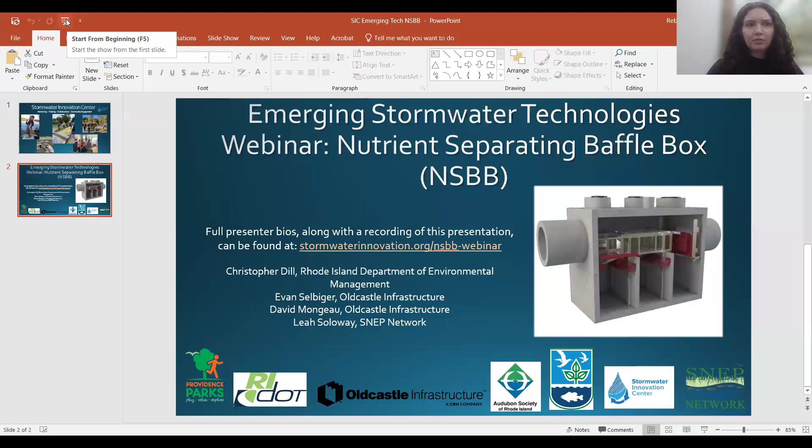So before we begin, I'm Rebecca Reeves, Education Outreach Manager with the Stormwater Innovation Center. To provide a little bit of background on the Innovation Center as well, I thought I'd share a few slides. So we are an organization that's part of the Audubon Society of Rhode Island. However, we focus on stormwater initiatives. Much of our work is based in the urban core of Rhode Island and in Roger Williams Park in Providence. However, we do work all over the state. And our 4 pillars of our work are monitoring, training, community engagement, and collaboration.

So just to give you a taste of some of the projects we do, these are some pictures from our projects. So upper left here, we have one of our partners at the Nature Conservancy monitoring for invasive carp in one of the water bodies within Roger Williams Park. This picture to the bottom right below it is a monitoring initiative we have called RainSnap, where we ask volunteers to monitor green infrastructure performance within Roger Williams Park.

And then right next to that is at our Rain Harvest Festival, which is an art and music festival in the park where we highlight environmental topics. So we had an artist come in and create a mural at the inlet to one of the green infrastructure projects within the park. So we had some families touring that and doing a little scavenger hunt activity.

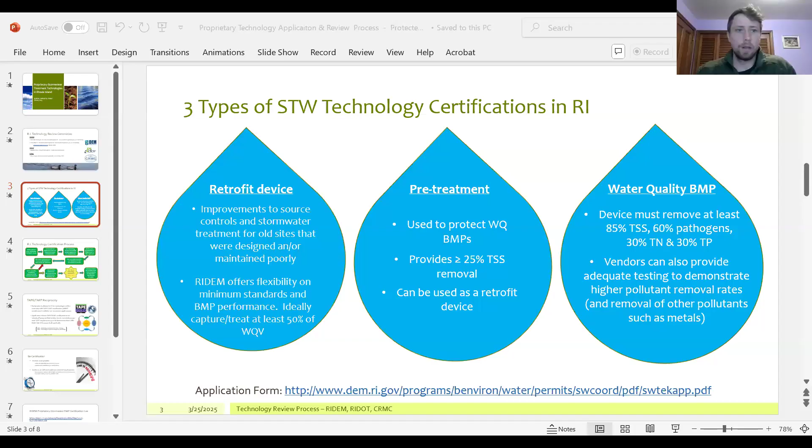All right, let me switch this. Can everybody see that now? We got it. Awesome, thank you.

Cool, so hello everyone. My name is Christopher Dill. I'm an environmental engineer with the Rhode Island Department of Environmental Management, and I work in the Stormwater Construction Permitting Program. We're the folks that approve different stormwater proprietary technology devices for the state of Rhode Island.

The technology review committee is comprised of staff from Rhode Island DEM, DOT, and the CRMC, which is the Coastal Resources Management Council. From DEM, we have my supervisor, Nicholas Pisani, and myself. I'm the primary contact for this program. So if anyone has any questions about it, or if a vendor would like to apply to get their technology certified by Rhode Island, they would reach out to me and we would get the process rolling, which I will go over in just a minute. From DOT, we have Deirdre Pava, and CRMC, we have Ross Singer.

So just a quick overview of the ways we can approve devices. Basically, there are 3 buckets that things can fall in. You start out with retrofit. That's pretty general. The requirements are pretty loose, and we're just looking to make an improvement on some older sites that could benefit from some stormwater infrastructure. A lot of these proprietary devices are great because they're typically more condensed, so they take up a lot less space in more urban areas where it can be tough to get treatment.

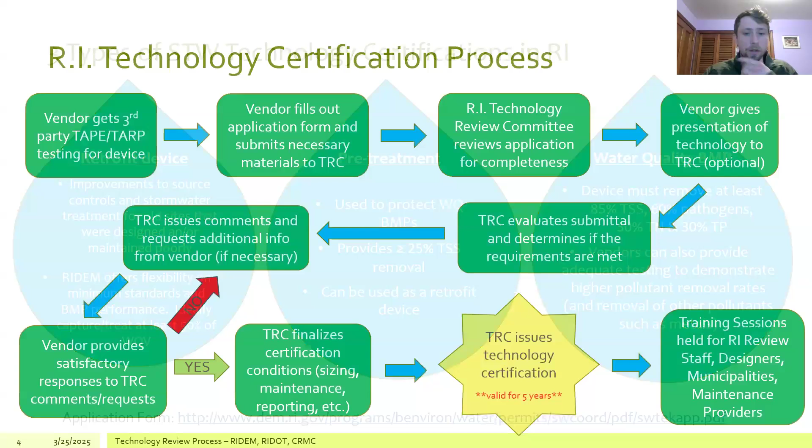The final bucket, which is the most strict and hardest to get certified for, is for a water quality BMP. That would be on par with a sand filter or an infiltration basin. To qualify, the device has to get 85% TSS removal, 60% pathogens, and 30% for nitrogen and phosphorus. Vendors can also demonstrate other pollutant removals such as metals, or removals higher than our baseline standards. The device we're going over today, the NSBB, is certified for pre-treatment and retrofits. At the bottom of the slide, you can see the page with the application form for vendors that want to submit technology applications.

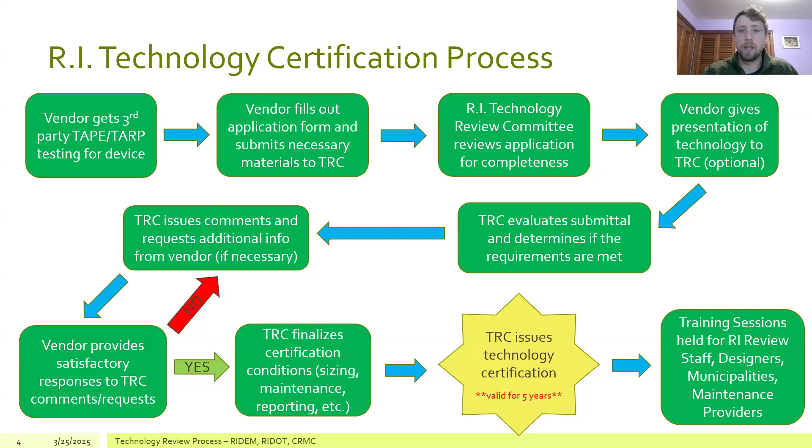This is a flow chart of our process. Basically, the vendor gets TAPE or TARP testing, which I'll go over in another minute, showing that the device meets the pollutant removal criteria. They submit their application. The technology review committee reviews and evaluates it, and typically we have some comments or questions that we'll go back with. If the vendor can satisfy our concerns, then we certify the device and work out the final conditions, like sizing, maintenance, reporting, and whatnot. We issue the certification, which is valid for 5 years. And then we end up where we're at today, training people on it and trying to get it out there so people can make use of these wonderful devices.

Like I said, the TAPE and TARP programs, at the bottom of the screen you can see what those acronyms stand for. TAPE is a program through the state of Washington. They're basically the front runner for certifying these types of devices with a very standardized testing protocol. The TARP program has since been dissolved, but typically anyone that gets a New Jersey certification qualifies for pre-treatment. If they don't have New Jersey or Washington certifications, they can submit third-party verified testing that has to be on par with TAPE requirements. You can refer to those sections of the Rhode Island stormwater rules to read up on that more. But typically reciprocity through those other programs is the fastest and easiest way to get a device certified.

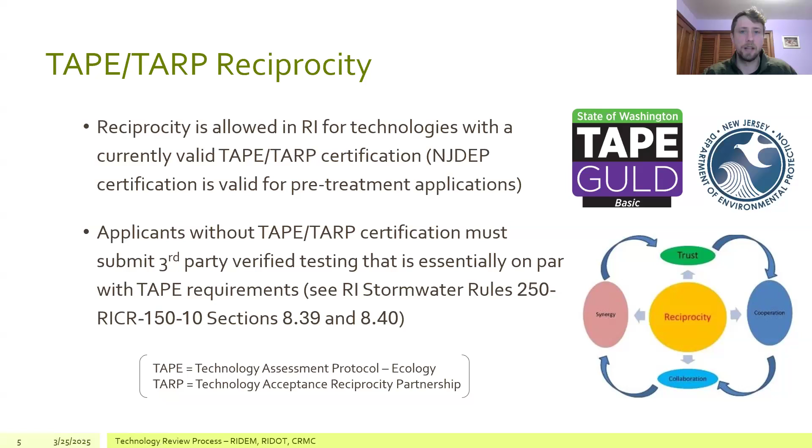As I previously mentioned, the certifications are good for 5 years. At the end of that 5 years, the vendor has to get it recertified, basically show us that it's still working and give us any new studies they've completed. And if they had previously received reciprocity, we'd like their other certifications to still be active if we're going to recertify.

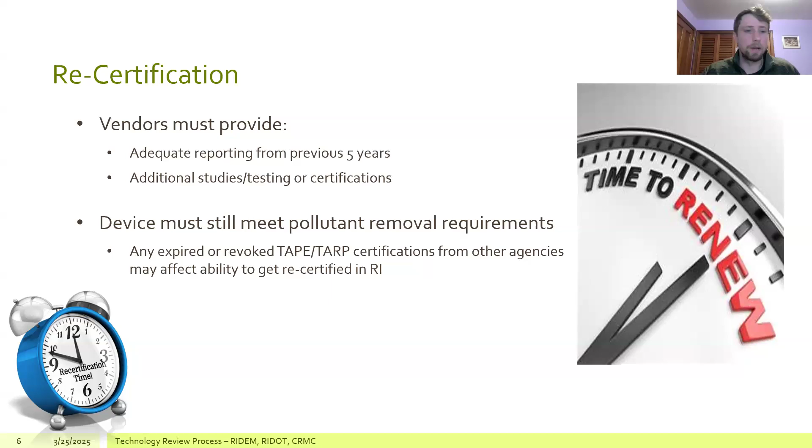So going back to the presentation, I don't know if everybody was actually able to see that or not, if it was just stuck on my PowerPoint. But if you didn't, just click on that link and you'll be able to check it out.

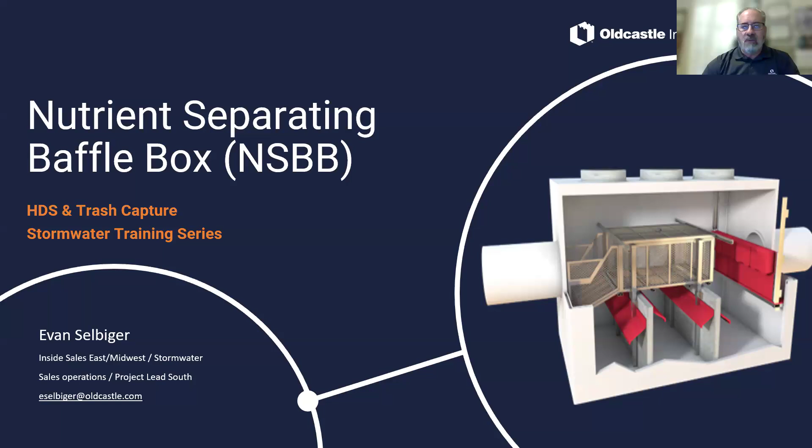I've been working for Oldcastle for 9 years. Some people consider me the NSBB product specialist, but my main role is inside sales. With that, I'm going to jump right into this and get started.

So the objective of this webinar is so that you can learn everything that you need to know about what the NSBB is and what it does. We're going to go over sizing, how to use them, and then the key message is going to be about maintenance.

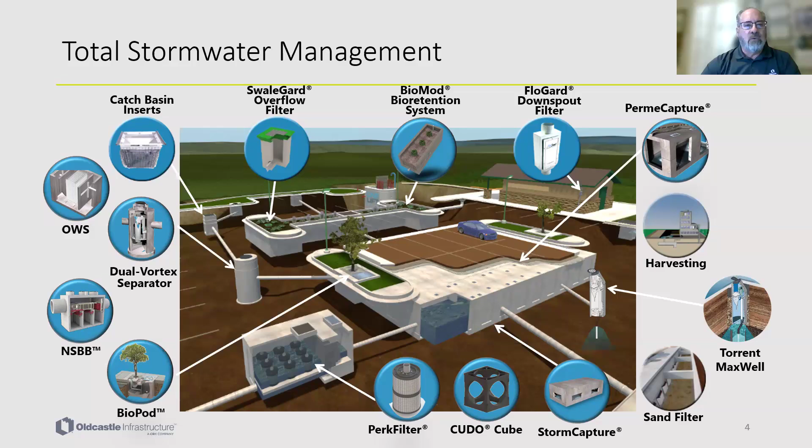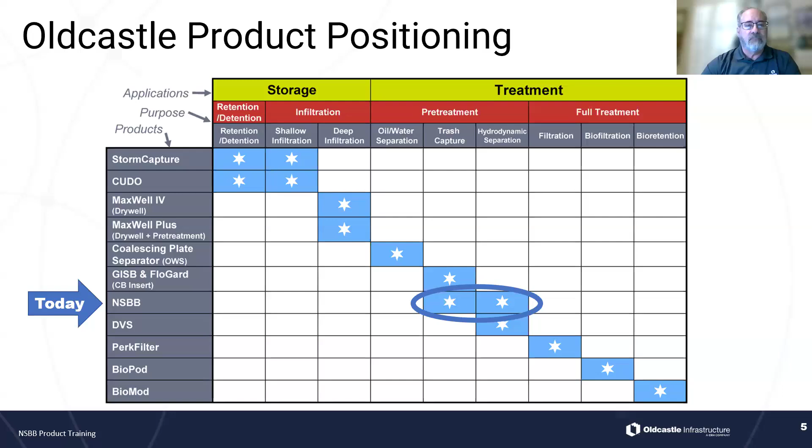So the NSBB is just one of the offerings that Oldcastle offers in our total stormwater management portfolio. It is a pre-treatment device. It can be pre-treatment for underground storage, above ground ponds, and it can be used for pre-treatment going out to impaired water bodies. It is a hydrodynamic separator, and it's also California trash capture compliant. I know we're not in California, but I just thought I'd mention it.

So the NSBB, or the nutrient separating baffle box, is a pre-treatment system to remove TSS, gross solids, trash, and debris. One of the unique features of the NSBB is our centralized screen system, which sits above the static water level when the rain stops, so that allows everything else in there to dry out between rain events.

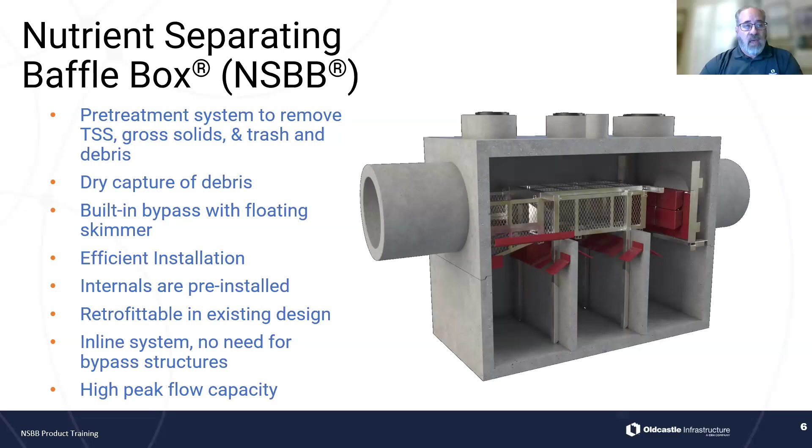Installation is easy for the contractors. Everything is pre-installed inside the concrete vault. It's a two-part system, so you have a base and a top section, which makes it easy for contractors. It is retrofittable, as Chris had talked about earlier, to existing watersheds, and it can also be done in new construction. It's inline, so there's no need for external bypass — all the internal bypass happens inside the system. And it has a high peak flow capacity.

We do have major approvals. We did just pass the new NJCAT, NJDEP certification and verification beginning of this year, 2025. We also have the Washington Department of Ecology, and the California Water Board approvals.

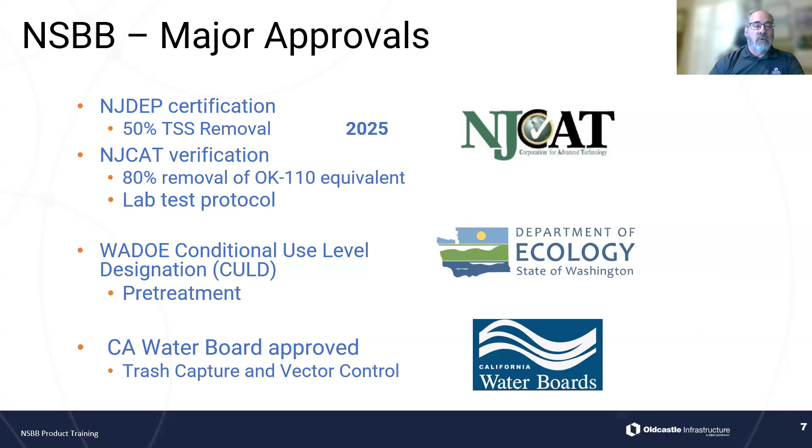And I don't think anybody's going to be able to hear the sound on this, but I'm going to play it and I'm going to talk through it. So you can still hear me, I'm assuming, Dave, correct? That is correct. And the video is playing as well.

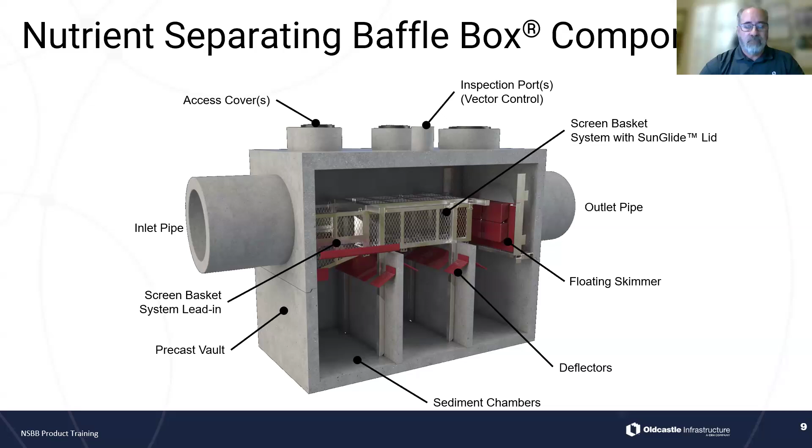Here's a little bit better look at it. You've got your standard 3/4 inch expanded metal - that's what comes standard. And in California, the trash capture 5mm perforated stainless steel screen is what's required.

The lids are what we call the SunGlide lids. They have a latch in the center and they slide open - they don't hinge, they slide open. You do have bottom doors that hinge open, which allows you to access the sumps for cleanouts. Nobody has to enter the vault in order to clean it out. Everything can be done from the surface.

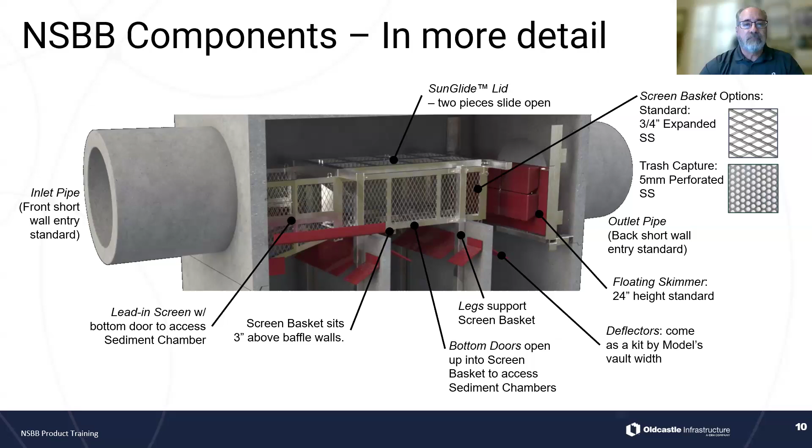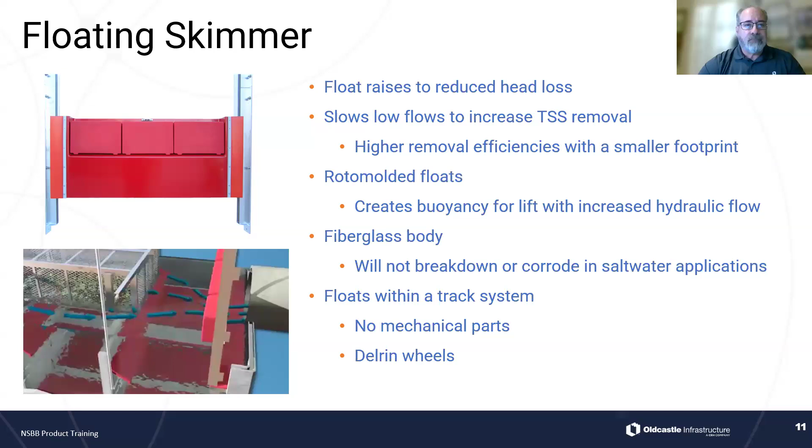So your standard vault sizes are 4x8, 5x10, 6x12, and 8x16. These are internal measurements - there are other sizes available. We use these sizes because they utilize standard forms, which makes construction that much easier at the precast level. There are other special sizes, a 10x20 and a 12x24 - those are segmented boxes, put together in several pieces, the bottom and the top.

You have a straight in, straight out pipe orientation on these boxes. However, the NSBB is capable of multiple pipe entries - in other words, you can have 4 entries into the nutrient separating baffle box: straight in from the front, 2 each from either side, as long as it's in the first chamber, and then you can actually have a grated inlet over the top of the first chamber.

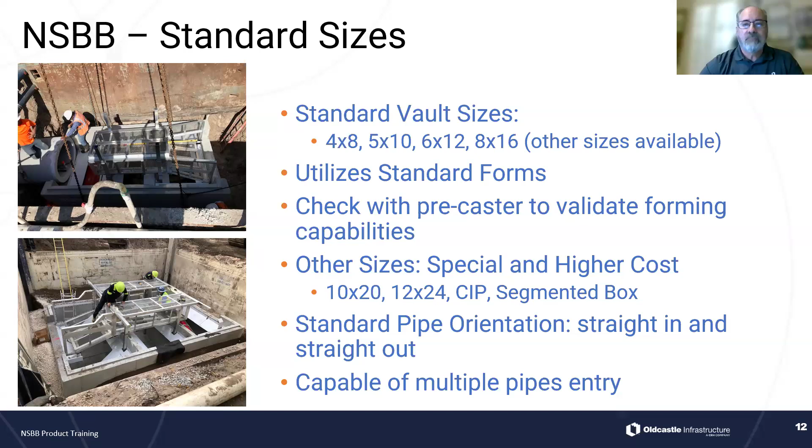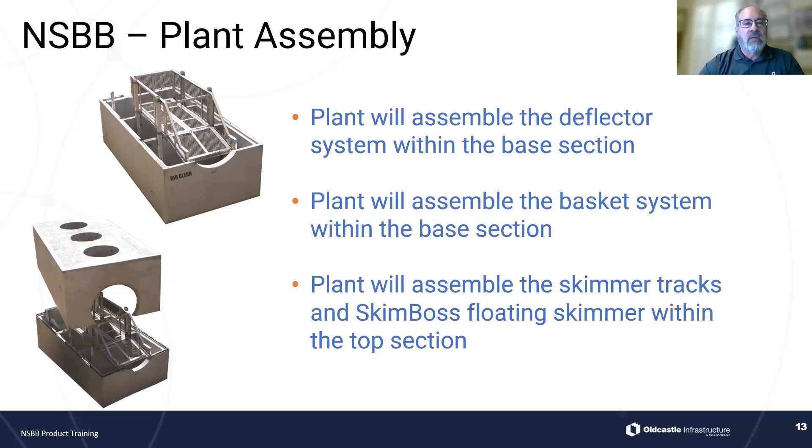So again, your plant is going to assemble all of your parts and pieces in the bottom half, including the screen system. The top half will have the tracks and the skimmer already installed, so that when it gets to the job site, all the contractor has to do is install the base, install the top, connect the pipes. The contractor is going to verify elevations, and they will install the inflow and outflow pipes.

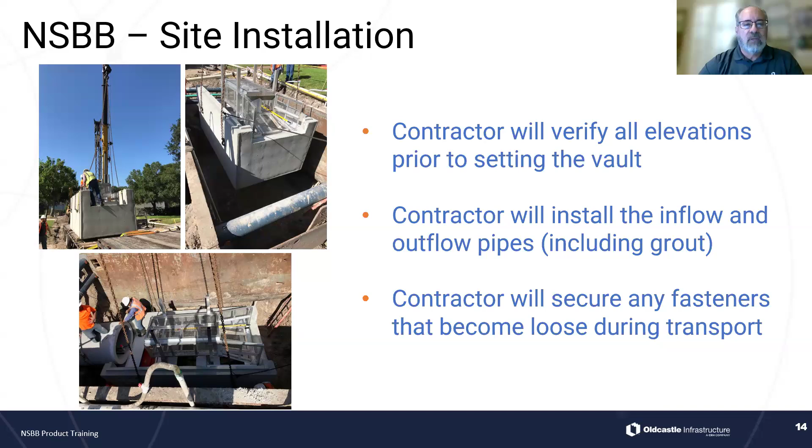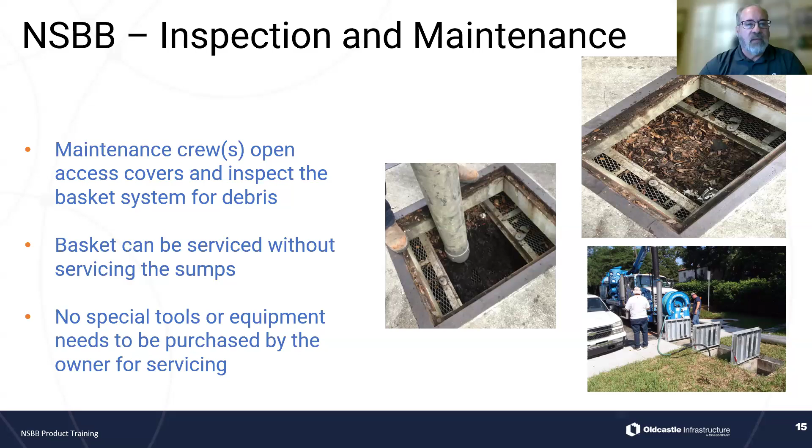Inspection and maintenance - again, maintenance can be done, as you can see in this bottom right picture, all done from the surface. No one has to enter the structure in order to clean it out. The top doors slide open so that the vac can vacuum out everything that's inside of the screen system. Here's a picture - you can see the top doors are slid open. There's a lot of leaves in here, and I'm sure up through New England during the fall is a heavy leaf dumping time. After rain events, the NSBB will collect a lot of leaves. So again, no special tools or equipment is needed in order to clean it out.

So when you're designing your system, some of the things you need to know that are going to help us let you know what size structure you're going to need: whatever the regulatory requirements are, the treatment flow rate is very important. We also want to know what the peak flow capacity is, what the pipe size is, and if the pipes are coming in or straight out, and at what angle if they're not perpendicular to the box.

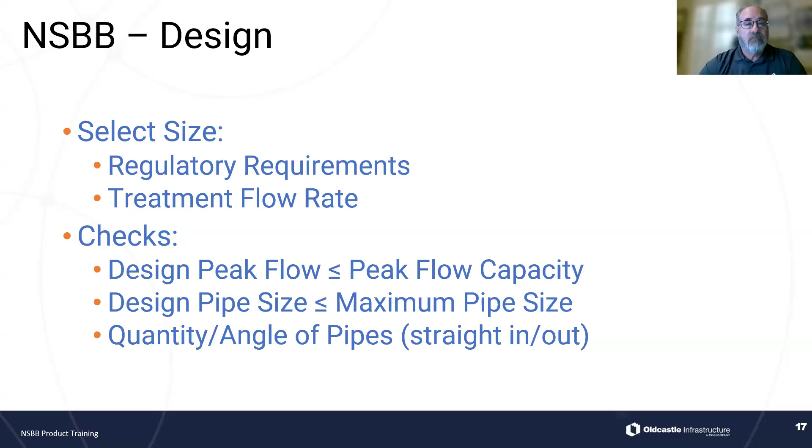This is just a summary of the newest NJDEP numbers for your sizes and your treatment flow rate to meet that 50% TSS removal rate.

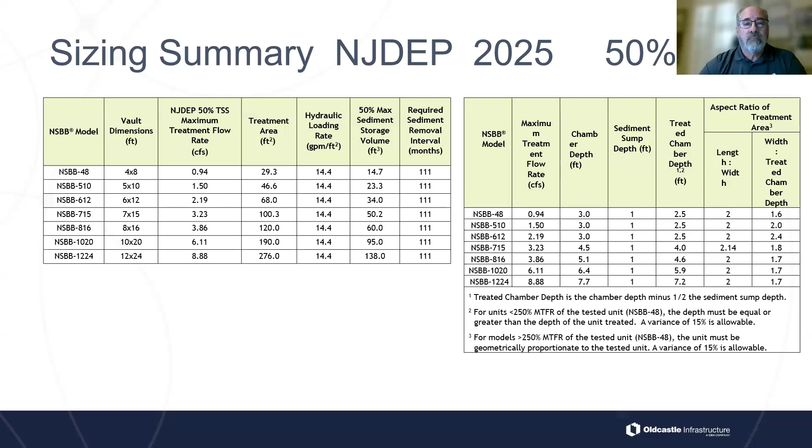And again, this is just a little bit more information that all was derived from the testing.

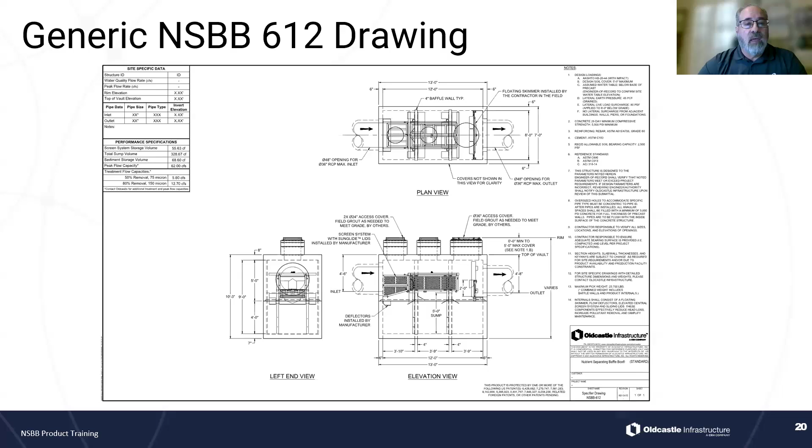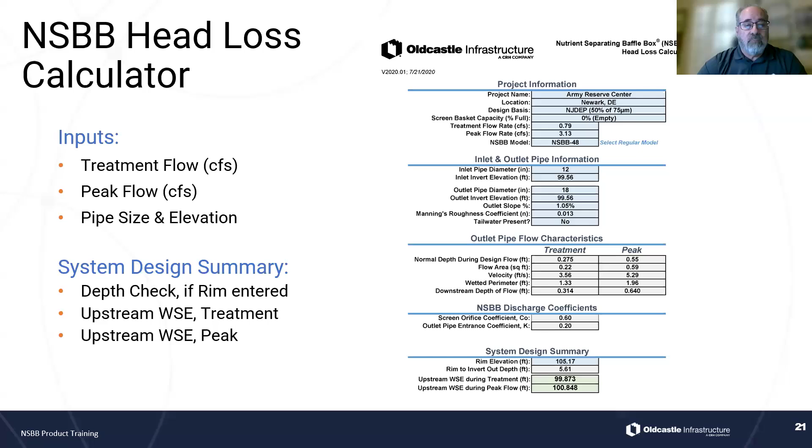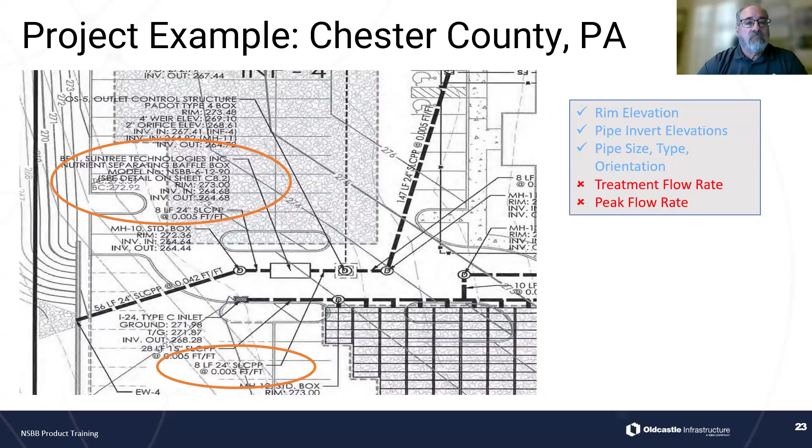So this is, again, just the review checklist that we perform. And again, we're using model 612, 6 by 12, on this particular project.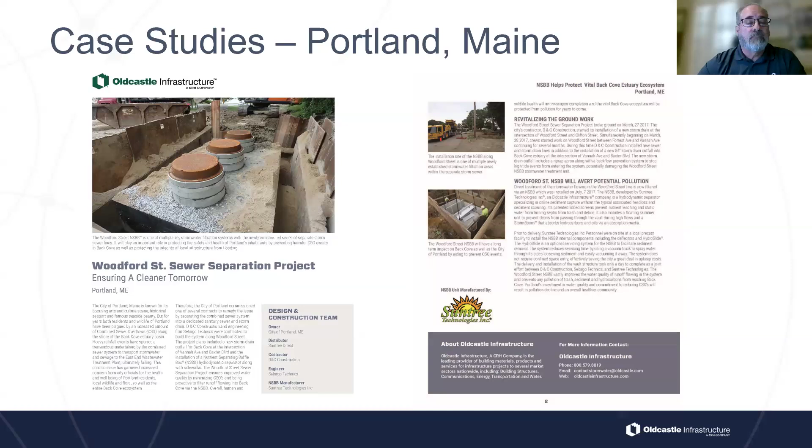So a couple of key messages: performance, support, we can bundle products, and maintenance. So performance - the NSBB is the industry-leading performance of a hydrodynamic separator baffle box system. There are other baffle boxes out there, but the NSBB is the oldest and, again, the leading performer in this.

And it is the original trash capture baffle box. The unique thing is the floating skimmer, which minimizes head loss and allows for internal bypass. So you do have bypass along the sides as well as over the top of the screen system if necessary, and there's enough internal bypass that meets or exceeds the surface area of the incoming pipe. You do have a high debris capacity with the storage in the screen system, and the deflectors avoid resuspension and scour.

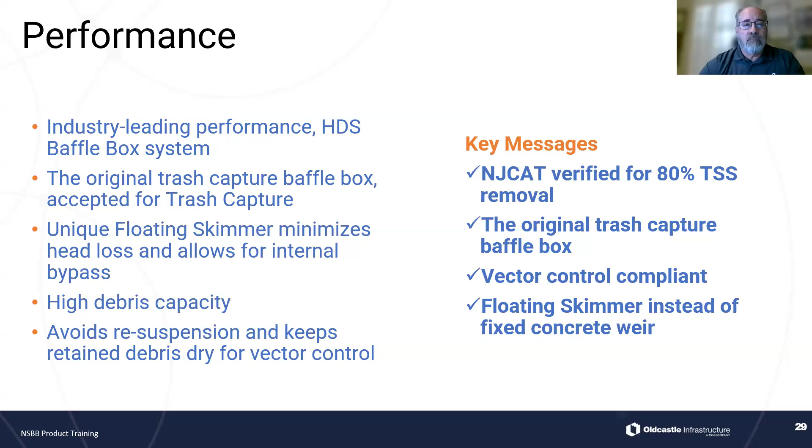As with any treatment system, you do have to maintain it. The NSBB works, so it does require maintenance. We recommend a minimum of quarterly maintenance, and again, everything is done from finished grade. Everything is easily removed from the screen system without the need for dewatering the unit. Again, there's no entry required into the baffle box for maintenance.

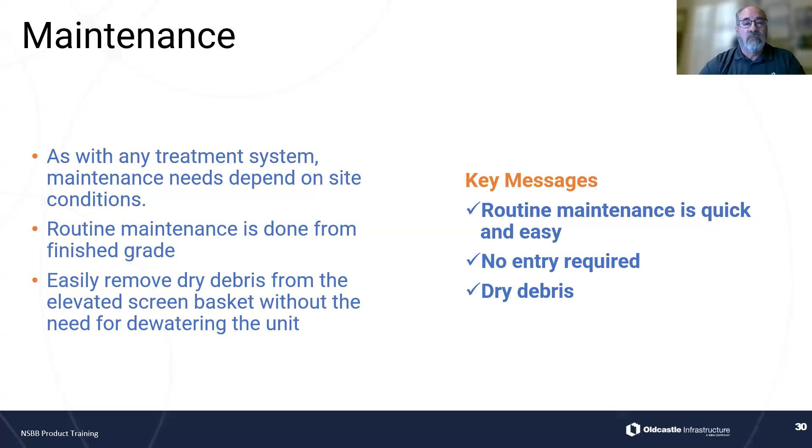When we talk about bundling products, it helps create a stronger specified position, whether you're doing the NSBB as part of pre-treatment to a pond or post-treatment - your complete treatment train approach. Oldcastle does provide this treatment train approach. We have a full drainage and stormwater product offering, giving us the ability to offer specifying engineers and contractors full site solutions.

And in support, Oldcastle infrastructure is backed by CRH company. We have vertical integration from product design through manufacturing, which offers unmatched control. You're dealing with one company throughout the entire process. Again, we offer best-in-class support through dedicated stormwater sales, engineering, and regulatory teams to ensure the best outcome to meet your project needs.